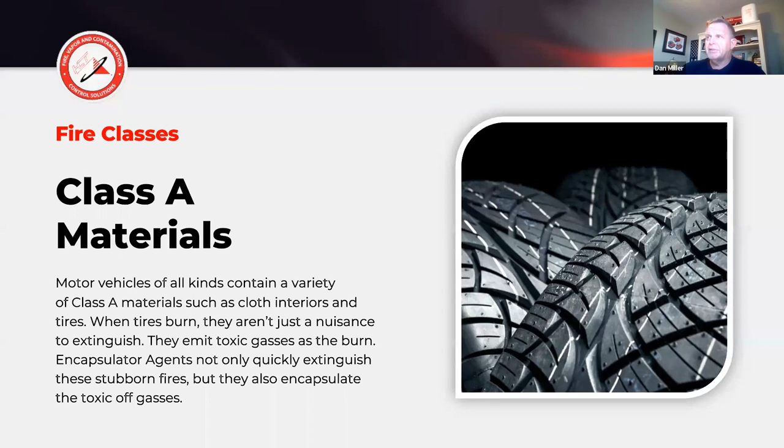And foam doesn't do a very good job either because it's a 3-dimensional object, and you can't make a blanket over a 3-dimensional object very easily. And that's what foam is for, making a blanket. So that doesn't really work for Class A fires like tires very well either. And with cargo in trucks and so forth, you can run into all kinds of different Class A materials in a truck.

Class B materials, obviously, there's a lot of those involved in roadside emergencies: fuel tanks that get split open in collisions, oil dropping out of the crankcase of an over-the-road truck, saddle tanks on the over-the-road truck can hold hundreds of gallons of fuel. There's just a lot of Class B hazards, and even what we would say are the solid fuels in a vehicle, although we may refer to them as Class A, most of them are manufactured out of Class B chemicals.

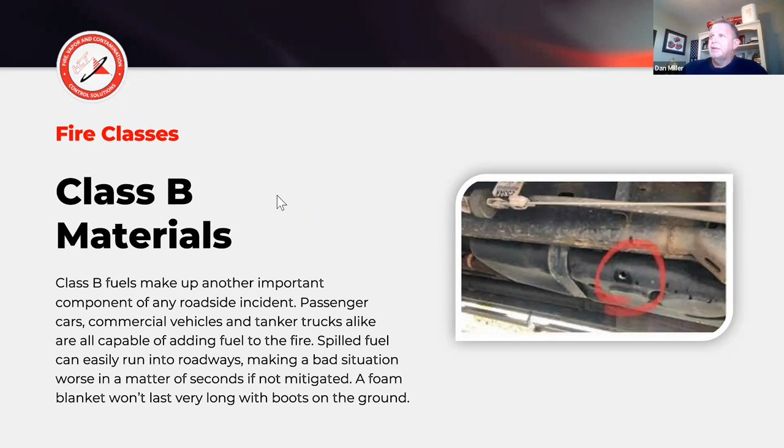So when they start to burn and break down, they more or less turn into a Class B fire as they start to pyrolyze and decompose. So a lot of these fuels are going to fall somewhere in between Class A and B. Class B materials have also evolved over time. We're not just dealing with straight hydrocarbons anymore. We're not dealing with diesel and pure gasoline anymore.

We've got gasoline with MTBE in it, E10, E85, so your different ethanol mixtures. We've got biodiesel, heptane, crude oil, and there's a lot of synthetic oils out there as well nowadays. So the good thing is our F500 encapsulator agent is compatible with all of those fuels. So you're not having to use a different agent for different fuels.

Three-dimensional fires. Anytime we have a three-dimensional object involved in a liquid ignitable fire, that's an example of a three-dimensional fire. And that fuel could be running down a gutter, running down into the ditch. If you look at where the fuel pump is in most modern vehicles, especially passenger cars and pickup trucks, that fuel pump is electric and it's inside the fuel tank. So if it's still got power and that fuel line's been severed, it could be pumping that fuel out.

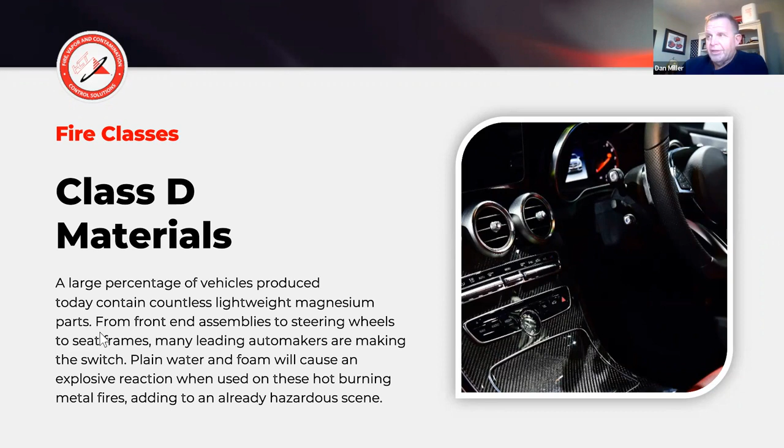Things like steering column, wheels, front end suspension components can all be made out of things like magnesium. So when that stuff actually starts on fire, and at some point in the vehicle fire it usually does, it can be very difficult to extinguish. It can burn upwards of 5,000 degrees. And then when the water hits it, as most of you know, it separates into hydrogen and oxygen and just excites the fire almost into an explosive state.

All of these are components that can be made out of magnesium. You've got your radiator saddle in the front end, engine components, dash components. You've got drivetrain components like transfer cases and so forth. Seat frames so that the seat stays intact in a side impact, for example. Steering wheels, steering columns. Got object number 11 there. If you've got a space frame or a uniframe type vehicle, that can be the framework that's either in front of or behind the passenger compartment.

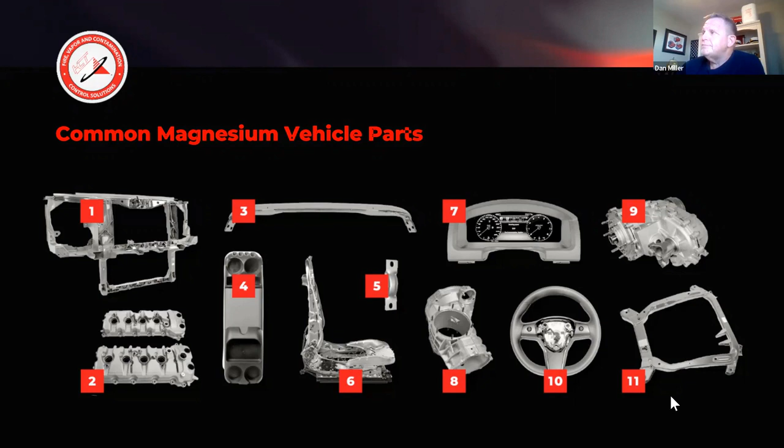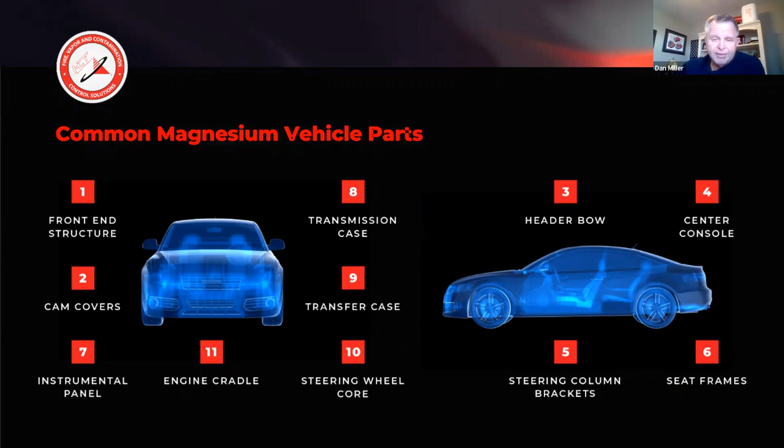There are just a lot of different vehicle parts nowadays that can be made out of magnesium, and it's really up to the vehicle designer and their imagination as to where they put it. Again, it lowers the vehicle weight and maintains the strength.

When it comes to hazardous materials, there's more than 3 billion tons of hazardous materials shipped every year, and over-the-road trucks transport those, of course. Not only the fuels and oils in the vehicle propelling it down the road, but also what they're carrying. So approximately 94% of the daily shipments include some type of hazardous material or hazardous waste.

Now it started going on its own. Trying to get it to stop and back up here. All right, did that. There we go.

There we go. So most of you have run into train and tanker accidents in your territories. So in Chile, we had an incident where there was a sulfuric acid leak, and they were trying to find a way to safely mitigate it without reaction. And if you've ever dealt with a sulfuric acid leak, you'll know that dilution is not the solution to pollution on those, and that if you apply water, you can have a violent reaction.

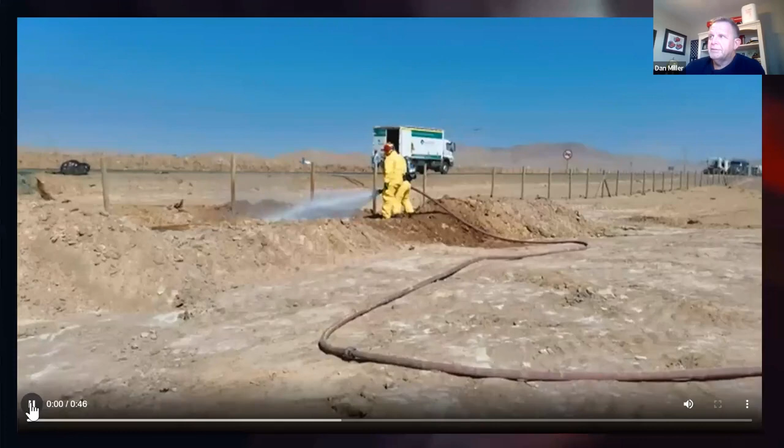See here in this video, sorry, Dan, this was in Chile with 6,000 liters of sulfuric acid, and a field response company started to throw water. The water started to heat to more than 100 centigrade. It started to have vapors.

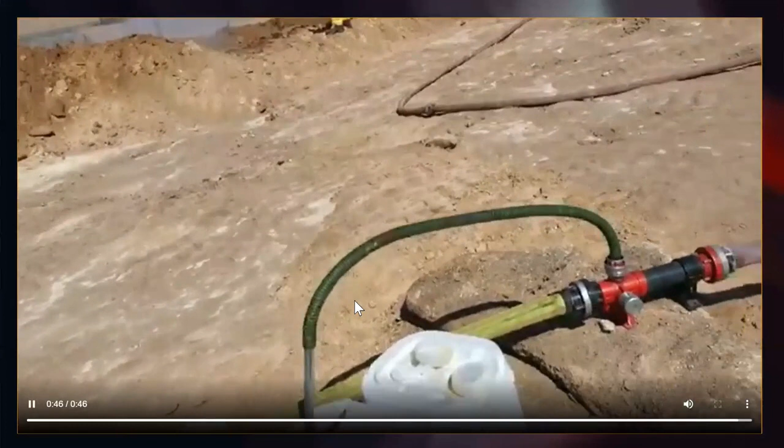When this fire department started to use the encapsulator technology, the thermal reaction stopped at 60 centigrade, and they could decrease the gases that started to bother a jail close to this, and an office of a mining company close to this incident. And in a few hours, they could finish, they could put it all in a safe state without vapors, and they could open the speedway.

Thank you, Hernan. No problem.

So this next incident was in Arizona. Go back. Keep skipping forward on me. Sorry. Carrying 8,000 gallons of gasoline and diesel, it went off the roadway. Do you have more information on this one too, Hernan? Hernan, do you have more information on this one as well?

Yes, this tank rolled over under the mountain, and they had a little amount of product, and they used 0.5% to encapsulate the vapors when the fire department started to try to close the valve and to move the tank. Do you want me to take over on that, Hernan?

Oh yeah, Ron, please. Oh, you're with us now. Yeah, I'm on my iPad. Oh, okay. Welcome back.

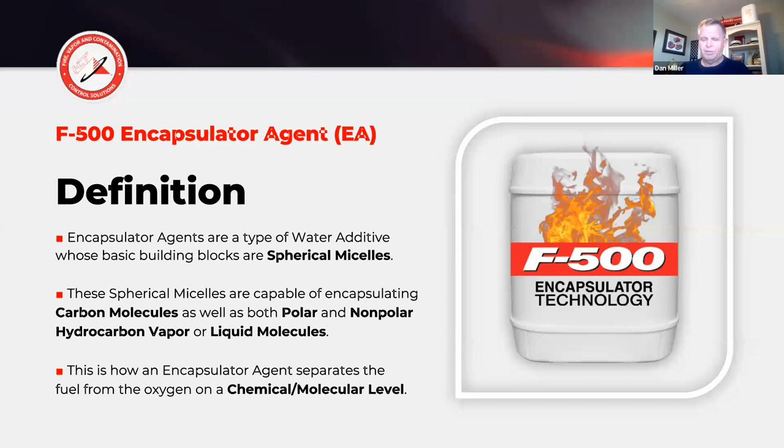And it does so permanently. This video is going to show you how the spherical micelles are formed in the water droplet, as well as how the F500 molecule sets up on the surface of the water droplet.

Encapsulator technology, the next generation of fire and hazard mitigation. First, we start with a simplified version of a single encapsulator agent molecule consisting of a hydrophilic polar head which loves water, dissolves in water, and a hydrophobic nonpolar tail which fears water and will do anything to get away

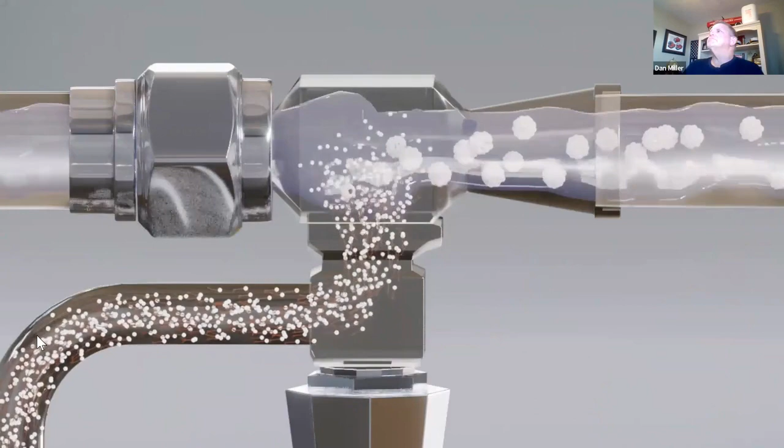from water. Once the EA molecules enter the water, they instantaneously and automatically orient with the nonpolar tails inward and the polar heads outward, forming millions of spherical micelles. Micelles travel towards and exit the nozzles, forming EA droplets.

Micelles nearest to the surface of each droplet automatically break apart. The nonpolar tails orient outside the droplet, with polar heads on the surface, forming an EA skin on the surface of every droplet. In addition to the EA skin, there are millions of molecular spherical micelles within each droplet.

So if you look at the structure of that water droplet, you'll notice on the surface is a coating of F500 molecules with the nonpolar tails sticking out and the polar heads adhering to the surface of the water droplet. And the polar heads actually dissolve in a kind of a film on the surface of the water droplet.

And then inside of the water droplet, the spherical micelles establish themselves, and the nonpolar tails point in because they fear that water, so they're going to point in on the inside of the water droplet with the polar heads pointing outward. So you get those little golf balls in there that are the spherical micelles, and there's actually millions and millions of those in every droplet of water.

And if you also take into account that F500 has a surfactant characteristic, each water droplet is smaller than a plain water droplet. So we have more water droplets and much more surface area. And between that increased surface area, smaller water droplets and more of them, as well as the structure of the water droplet and how it's altered by the F500 involvement and influence on it, it is able to absorb heat much more readily than plain water. And it does so very well. And that's one of the things that makes it work so well in a lot of different situations.

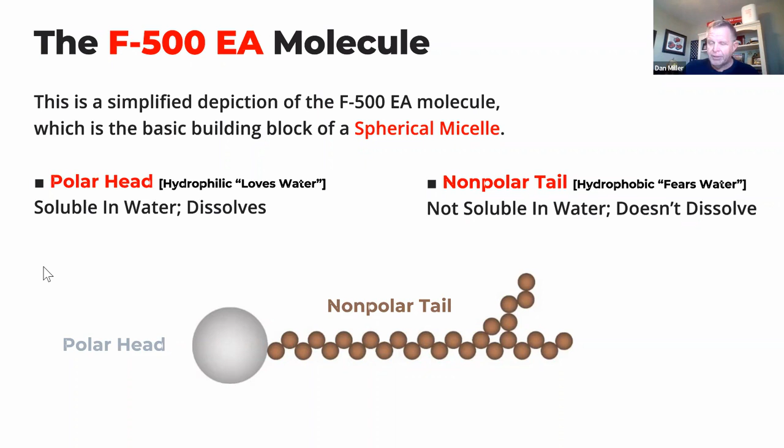And then as the F500 encapsulator agent concentrate is proportioned into the water stream, it readily mixes with the water. And then as it comes out of the nozzle, each water droplet surface gains a coating of the F500. And then inside of each water droplet, millions of spherical micelles are formed. As a part of that process, it absorbs heat very, very readily. It's a transition that occurs instantaneously.

And then as those water droplets fly through a vaporous atmosphere that maybe contains a flammable vapor, it's encapsulating those hydrocarbons, the vapor. And then as it strikes the surface of a liquid ignitable fuel, it readily mixes with it. And we use kinetic energy to purposefully mix the product with that fuel. We're not applying it gently like a foam. And then that helps it mix and encapsulate the liquid fuel as well.

So on a chemical molecular basis, you're able to interfere with each segment of the fire tetrahedron. We're excluding oxygen by trapping the hydrocarbon inside of the spherical micelle and locking it up and not exposing it to oxygen or oxidation. The fuel, we're making it not fuel anymore by readily mixing with it, encapsulating those hydrocarbons and turning it into an inert waste material.

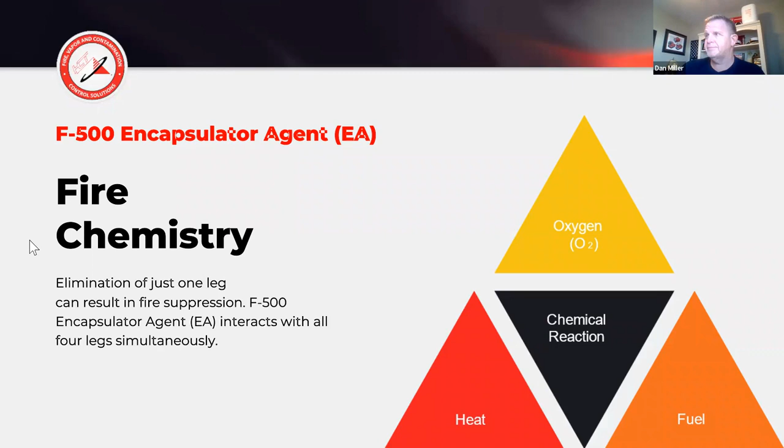The heat, due to the structure and size of the modified F500 water droplet, we're able to absorb anywhere from 10 to 30 times as much heat as plain water. And then also, as a part of that, it interrupts the chemical chain reaction, the ability of the fuel to oxidize. As a result of that, F500 is compatible with all classes of fuel. So your class A's, B's, metals, lithium-ion batteries, etc.

We've also got a lot of testing that's been done by Con Edison of New York and New Jersey, and they've worked with us on testing to show how it can be applied to up to 345,000 volt electrical services with a reasonable standoff distance and a broken stream, of course, that make it evident that it does not transfer electricity near as well as plain water. So it's applicable to transformer fires and things of that nature with a little bit of training and common sense.

So the encapsulator agent has a few different superpowers. Number one is encapsulation. Encapsulator agent drastically reduces the risk of ignition and reignition, has great burn back resistance. The fact that it encapsulates those hydrocarbons inside of the spherical micelle allows it to really absorb a lot of heat, readily mix with the fuel, turn the fuel into an inert waste material, and cool objects within the fire very, very rapidly.

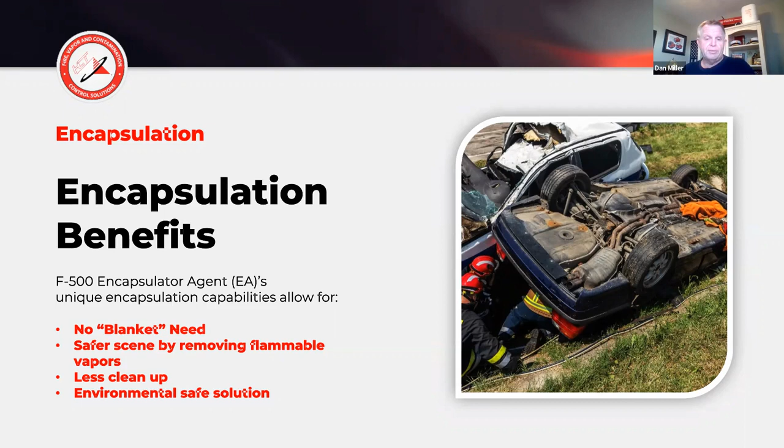And actually, when you apply water and or foam or a combination thereof to a fuel spill, it just spreads the contamination. It doesn't mitigate it in any way. When you apply F500 encapsulator agent, it takes away the flammability and it treats the environmental hazard as well at the same time.

In 2018, there were approximately 212,000 vehicle fires, including 560 deaths and 1,500 injuries. My own cousin and my neighbor's kid got in a head-on collision near my hometown here in Nebraska in 2018, and both of them were caught up in a vehicle fire, and both of them died as well. So that's a loss that hits home for a lot of people. Property loss from those incidents was almost $2 billion. So I'm going to show you how F500 encapsulator agent can make a difference.

If you want, Dan, I can share my screen to show the video. That would be great. Okay, give me a moment. No arrow on my end. Okay. I need to share this screen. Screen is yours.

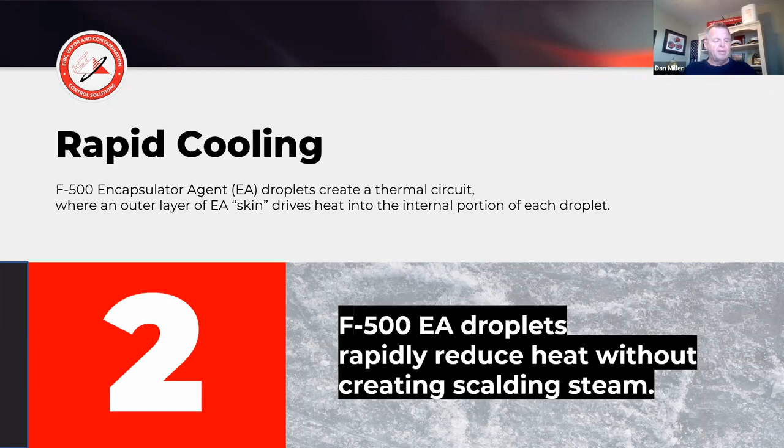And then inside of the water droplet is the millions of spherical micelles, which also readily help absorb that heat into the internal part of the water droplet. So it sets up a thermal circuit that we call thermal conveyance. And it's really just many, many times more effective than plain water. So rapid cooling is the next superpower. So we can go on to the next slide.

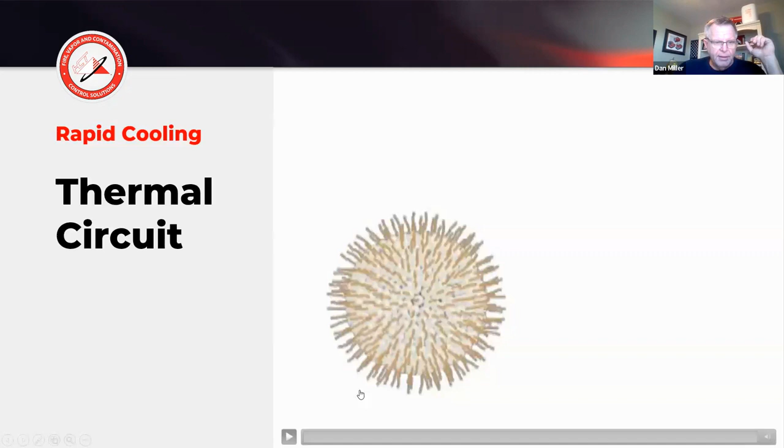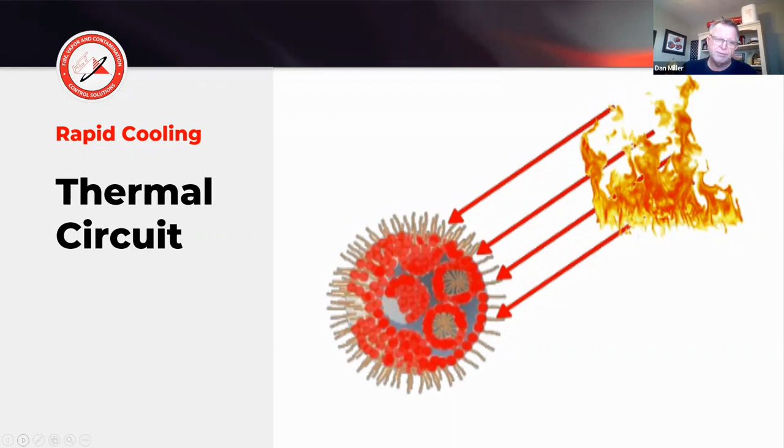So this video is showing you how it absorbs that heat using the modified water droplet with the non-polar tails on the outside, absorbing that heat into the polar heads and then into the interior of the water droplet filled with spherical micelles. You're looking at this in a thermal imager view. And you're going to see how that heat is immediately absorbed and taken away by the F500.

It is a very, very efficient cooling agent. And the fact that it's a protected water droplet, protected by the F500 molecules, it doesn't react with metals fires. So all it does is cool them, which is great because it puts them out.

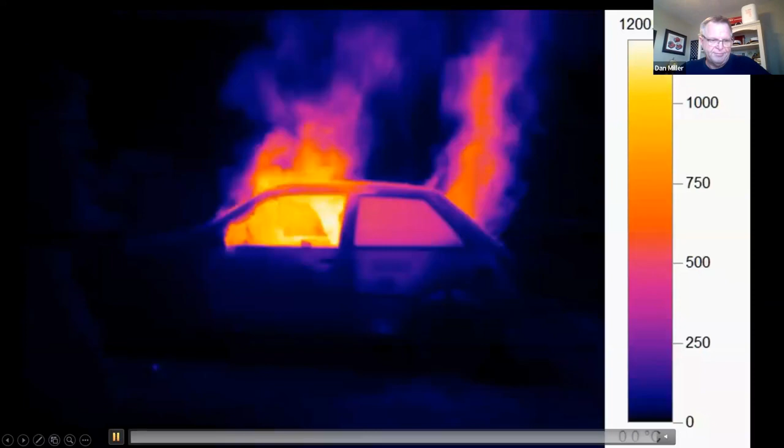Might have to unmute this video.

Here we're using the torch on the back side of a piece of steel. You see how that energy is transferred through the steel to the other side and catches the finish on fire.

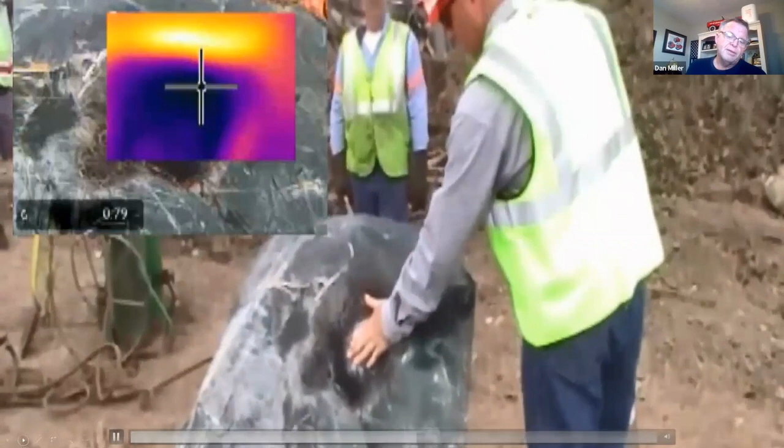Now we can apply F500 to the backside that's not on fire and actually cool the steel enough to put out what was on fire on the other side. Which is illustrating the fact that it absorbs heat very, very well. And he's able to walk up just a matter of seconds later with his bare hand on it and not experience a burn.

So those benefits result in less water needed, less damage to the infrastructure or whatever's on fire. And if you've been on fires that involve asphalt roadway, fuel burning on those can actually cause damage to the roadway. This helps cool those things much, much quicker. There's less highway operation time, which keeps your crews safer. There's a payoff in that regard as well.

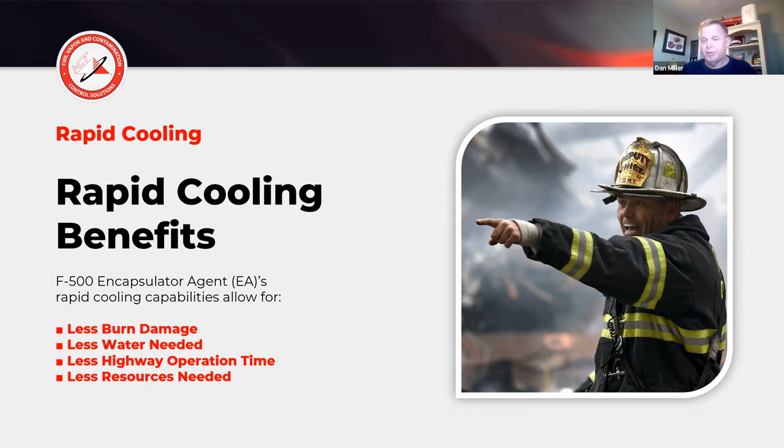Less resources needed. And one of the big things that I always dealt with as a fire chief is availability of units. So you have back-to-back calls. Availability of your units is a big deal. If you can more responsibly manage those resources by allowing them to spend less time on the scene, it's better for the public. Go ahead.

And that less operation time results from more rapid cooling, more rapid encapsulation of fuel that might be on the roadway or anything like that, less time dealing with cleanup and removal of things that end up on the roadway.

Go ahead. So the third superpower of F500 is toxin reduction. So those droplets in the spherical micelles encapsulate harmful hydrocarbons and carbons, volatile organic compounds, polynuclear aromatic hydrocarbons, those things that kill firefighters. And they can be acute toxins or they can be of a chronic nature. As we know, no combustion on the surface of the earth is perfect. It all puts out free radicals because of incomplete combustion.

Those free radicals then are looking for a way to get back together, to restabilize and to form new compounds. So they create just a rainbow of compounds that are both chronically and acutely toxic, and some of them are also flammable. So the smoke that you see coming off of a vehicle fire or a building fire or any other kind of fire, those are those free radicals rejoining up into VOCs and PAHs that number one are flammable and help the fire progress and grow. And number two are toxic. Go ahead.

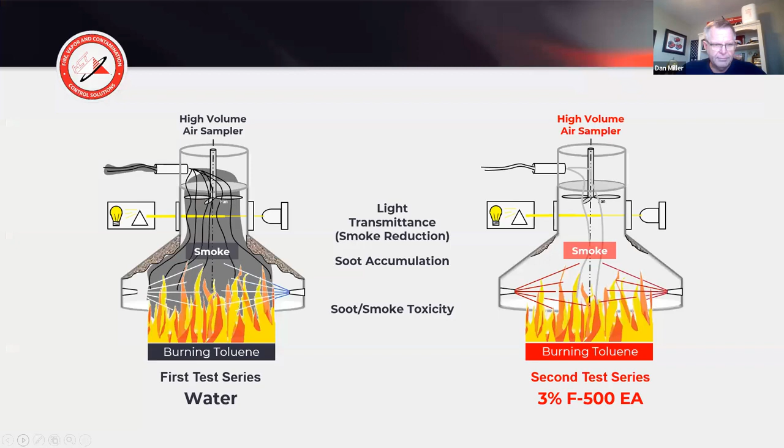So some benefits from the reduced toxins include a reduction in the cancer risk, and that's what they were looking at in the Laval Fire Department study in cooperation with Ottawa University, looking at carcinogen exposure to firefighters. And as I mentioned earlier, they found a significant reduction in the exposure to carcinogens when F500 was used on initial fire attack. Yes, you can use it later on to wet things down, second line, third line, but it's best to use it on initial fire attack so you have all of the benefits of it.

Number one, faster fire knockdown, less time on scene, reduced cleanup, but also that reduced cancer risk exposure. Improved firefighter health, especially over the lifetime of a firefighter, how many years they're on the job or volunteering. You can reduce that risk over time through reduction in chronic exposure. That's great. Less toxic runoff. We're encapsulating the carbons and hydrocarbons out of the runoff as well, so we're making the runoff more environmentally friendly.

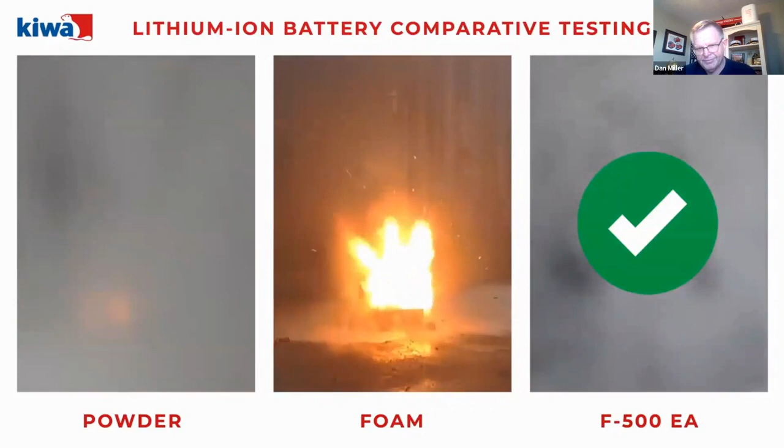Foam was completely ineffective. It doesn't cool at all. But the F500 was effective with a very small amount. Some reasons for that include the fact that it's got a surfactant characteristic to it, but it soaks readily into what I call the interstitial spaces, both between the cells and in the cells, and it interacts with the hydrocarbon electrolyte and encapsulates the hydrocarbon electrolyte as well as the flammable gases that are coming off of those battery fires.

And we know due to several studies done as well as our own knowledge of the product that it cools anywhere from 10 to 30 times more effectively than plain water alone. So the combination of those factors comes together to make F500 effective at extinguishing lithium-ion battery fires.

And Johnson Controls put out the report afterwards, and just so everyone knows, Johnson Controls is kind of a major competitor of ours. They create a lot of foam products, and they own a lot of companies that create foam products and other products. But they did come out and say that dry powder was a poor extinguishing agent to use on lithium-ion battery fires, and that it should not be applied to lithium-ion battery fires.

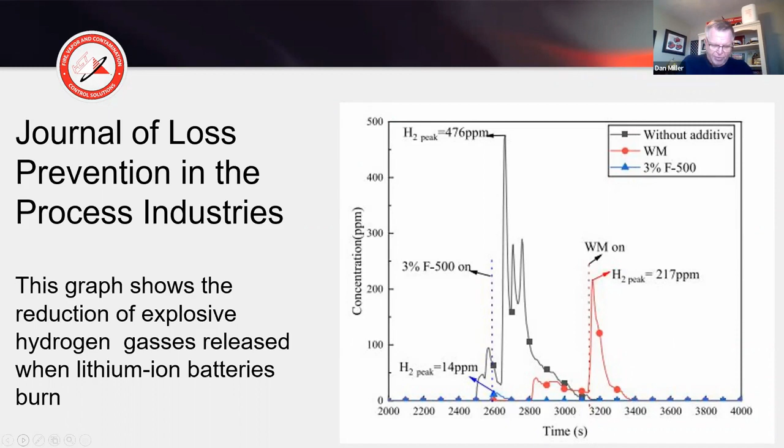So this testing was done at TU Clausthal in Germany, and that's a learning institution. What we have here is basically a pack of 18650 cells that are ignited by some heating elements, and then that's let to heat up.

And then over the top of that, you've got an F500 extinguishing agent system that's going to initiate here momentarily. And you're going to see how rapidly the F500 puts that out. I was looking for the word glow plugs earlier. They put diesel glow plugs in the battery pack and ignited the battery that way.

As you're going to see, once the F500 goes on, fire goes out very, very quickly. The temperatures are regulated very, very quickly, and the fire is permanently extinguished. And that's one of the problems you run into when you apply plain water: thermal runaway and the chemical reaction inside of those batteries and battery packs can continue on and repeat itself over and over for days

up to weeks. So if a vehicle gets towed away from the scene of the incident and doesn't get segregated or separated from other vehicles, or it gets parked inside of a building, it can catch fire again. So you may have seen some solutions from around the world where they're dunking cars in a vat of water for days until they know it's out permanently. That's not the greatest solution either. So problematic.

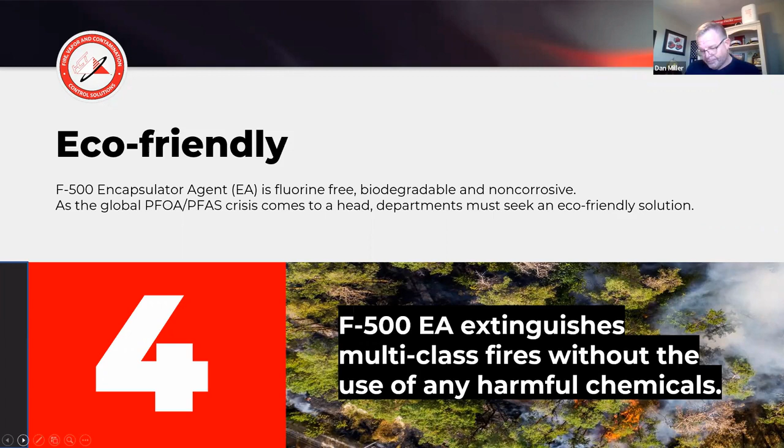Okay, so the fourth superpower of F500 is that it's environmentally friendly. It's fluorine free, it's biodegradable, non-corrosive. It's at a 7 on the pH scale. You can wash your turnout gear with it. It'll actually encapsulate the PAHs and VOCs off of the turnout gear after the fire. You can use it in your turnout gear laundering and post-fire decontamination as well. Go ahead and go on to the next slide.

Cancer, obviously one of our biggest concerns nowadays. It's killing firefighters, both because of the fluorinated agents in the foams, but also just the fact that there's a lot of synthetics in these fires nowadays, and as a fire burns, it's putting off these compounds and it's collecting on firefighter turnout gear. As you go to pull your gloves off and take your SCBA off, you're re-exposing yourself to it constantly.

Even if you're a fire department that bags your turnout gear on scene, you're getting re-exposed as you're bagging it. And then back at the station, as you're unbagging it, you're getting re-exposed again. So if we can apply it on scene and encapsulate those harmful compounds right there on scene and keep that secondary and tertiary contamination from happening and stop dragging this stuff back to the station, it'll benefit everybody. And again, it's environmentally friendly as well.

It stops the smoke production. All of that stuff goes out somewhere and lands on something, whether it's car door handles, playground equipment, yards, your roof. All of those compounds go somewhere. They don't just disappear. F500 stops the creation of those compounds, those dangerous compounds. And F500 is EPA listed as a surface washing agent as well. So, go ahead.

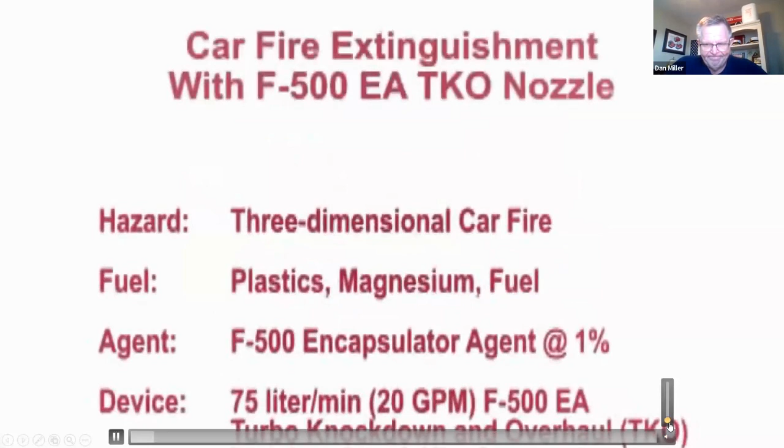And you'll notice it's only a 20 gallon per minute nozzle, but it puts out this car fire very quickly. Modern car fires, all the synthetics, metals, and everything else. Typically, you're looking at a 120 to 150 GPM line. This one, we're doing the same job with a 20 GPM line, using a lot less water, creating a lot less mess. Again, putting that fire out quickly, cleaning up your equipment, getting off the roadway, getting back into service, making yourself available for the next call.

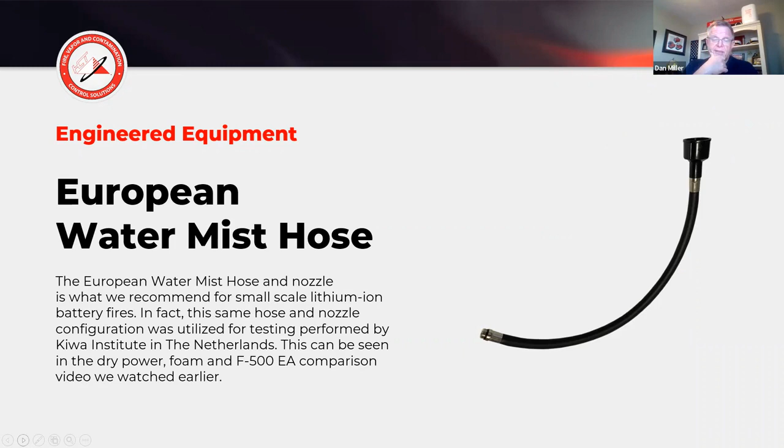We do offer pressurized water can style extinguishers with a few different wand types, and typically we just recommend that you mix a 3% F500 solution in there, and that way you're ready for a fire, whether it's class A, B, C, D, whatever. European water mist hose puts out a nice broken stream application, cools very, very well. And that's what was utilized for the testing by Kiwa in the Netherlands. And it works very, very well for most types of fire.

We do work with a partner, Amerizorb, for a throw and go type of absorbent product. It's a peat moss based absorbent product. So if you're in a situation like I live in Nebraska, it's kind of cold today, where whatever dropped on the roadway freezes, this is an alternative for that freezing weather. It has very similar properties on a spill that F500 would. Absorbs the flammable liquid, makes it inert, makes it not flammable.

It's also a good partner with F500 after you've applied F500 on a highway spill, for example, and you want a way to absorb it, pick it up and get rid of it. The Amerizorb works very, very well for that. A video on how Amerizorb works.

Kind of skippy on our end.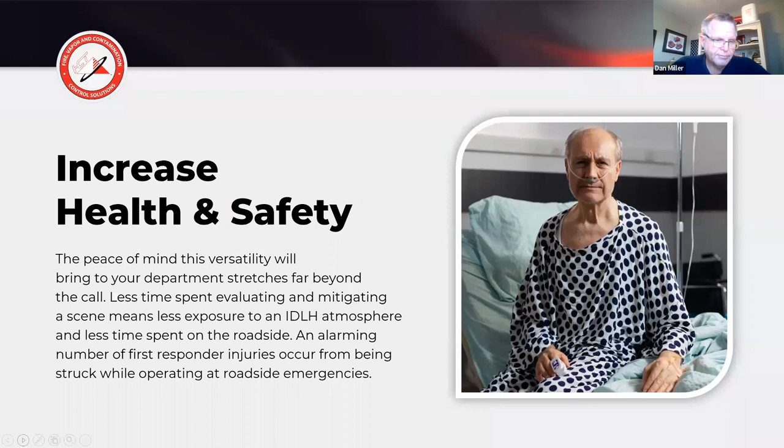Have a decrease in injuries by the fact that, mostly, firefighters are spending less time on the scene. They're expending a lot less work. When you apply F500 on initial fire attack, you don't have as much work to do on the backside.

Decreases the number of resources, lets you turn resources around sooner and get them back into service, whether they're units that were on the way to the call because it was a stubborn fire and it didn't go out. Now the fire goes out more quickly. Those resources can be turned around quicker, whether they've made it there or they're already on the scene. They can be released from the incident sooner and get back into service, become available for the next person that needs your services.

It's also a big fact that it's environmentally friendly. There's no soil contamination. Actually, it's more than environmentally friendly, it's environmentally beneficial. If you're concerned at all about environmental health and safety, you'll know that there's an environmental impact from every fire. We reduce that environmental impact through the application of F500 on initial fire attack to the end of the incident. There's less airborne contamination, there's less runoff contamination, and just less contamination overall. It's friendlier for the environment.

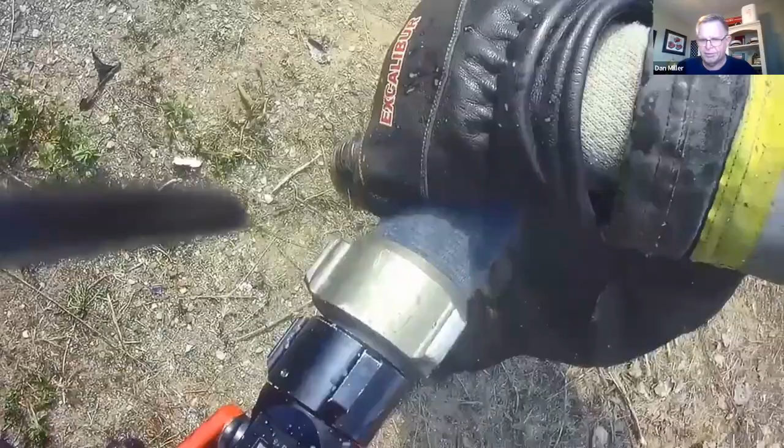One thing I do like to caution everybody about is when you're using F500, make sure that you've got F500 coming out of the nozzle before you make that initial fire attack, so that you can expect good performance. If it's not coming out of the nozzle for whatever reason, maybe an eductor's not performing right, a kink in the hose, FoamPro isn't working great, then you're going to expect lower performance. But if you make sure you've got F500 coming out of the nozzle in that initial fire attack, you can expect good results, good outcomes.